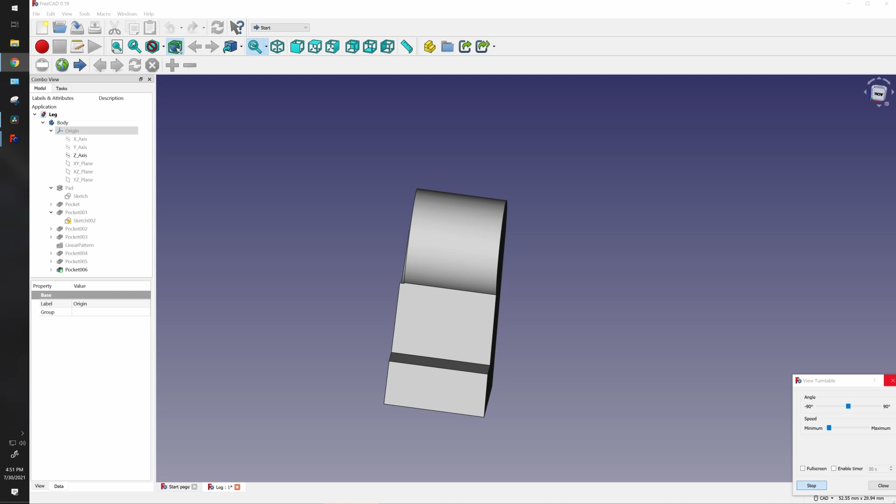Today we're gonna be making a leg for our Lego man. I'm super excited about this one because, you know what? I am a leg man. So let's get on with it.

Create new, and you know what, we're gonna do a little bit of a cheat here. Let's go to part design. You would usually create a new body, but here's a little trick: let's just create a new sketch, and check that out, it automatically makes a body for us.

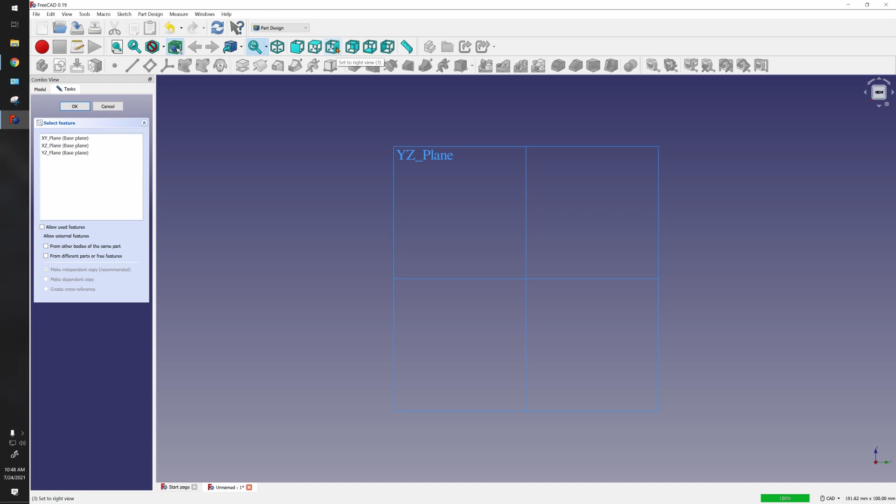So I want to go to my right plane. Click to the right, which is our YZ plane. Click on here, of course. Click OK. Now let's use our polyline tool.

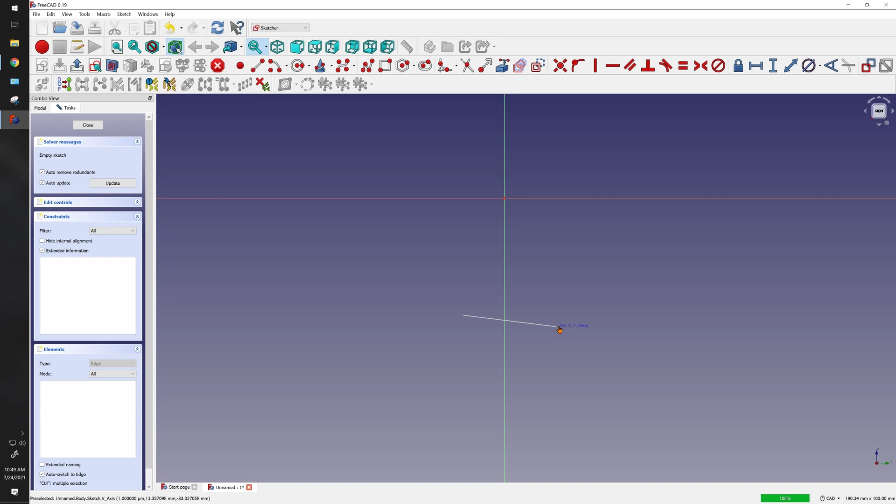What's really cool about this tool is it's got a couple modes. Let's start working with this. Let's start about down here, we'll go over, and I'm purposely making sure I don't have anything vertical or horizontal.

When you get here, click your M key once and then drag over. See this? Click it again. Click it the third time, and look at that, now we got an arc.

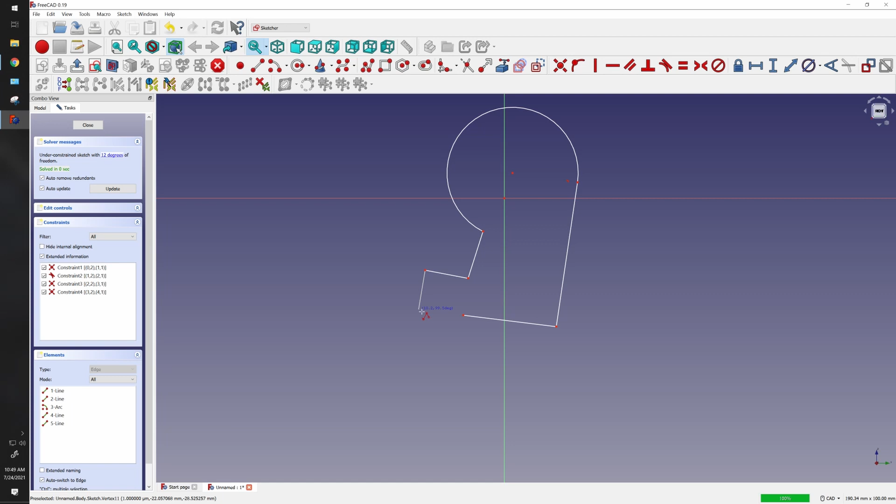So now I could just go like this, and of course now I'm selected. Hit M again, hit M again. I'll go down, we'll go over. And at this point we want to go back here, and look at that, we kind of got our shape, but not quite.

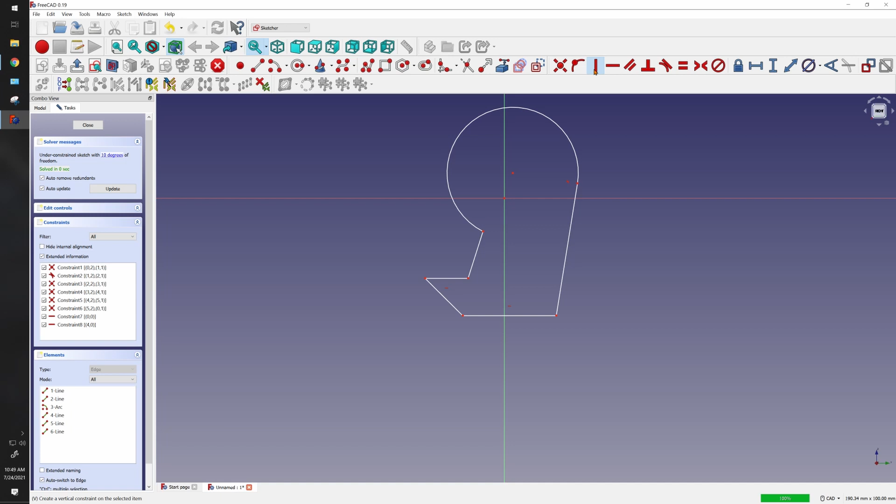We can use constraints to fix this up. So let's do a horizontal constraint, starting with our two lines that are horizontal, this guy and this guy. Now we want to do a vertical constraint, so we have three vertical constraints here, this guy and this guy.

We kind of can see our shape here, which is pretty neat. Of course, I can take this and move things over, and we're not fully constrained.

Because we're lacking dimensions. Before we start with dimensions, I want to lock this into the center. I want to make this the middle of my sketch. So let's grab this guy here, click him here, and click here, and now this guy's the center.

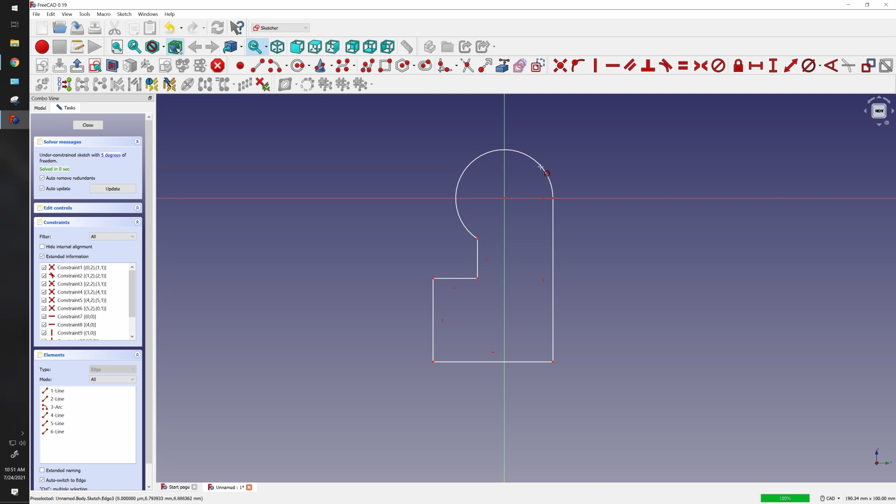This guy's kind of the star, right? Everything will revolve around this dimension. So let's click our diameter, and our diameter here is, of course, 7 millimeters. You can see this will try to adjust and it'll always do funky things.

The next dimension I kind of want to add is let's add this shoe. So I want to go to my vertical, and this dimension is 3.2 millimeters.

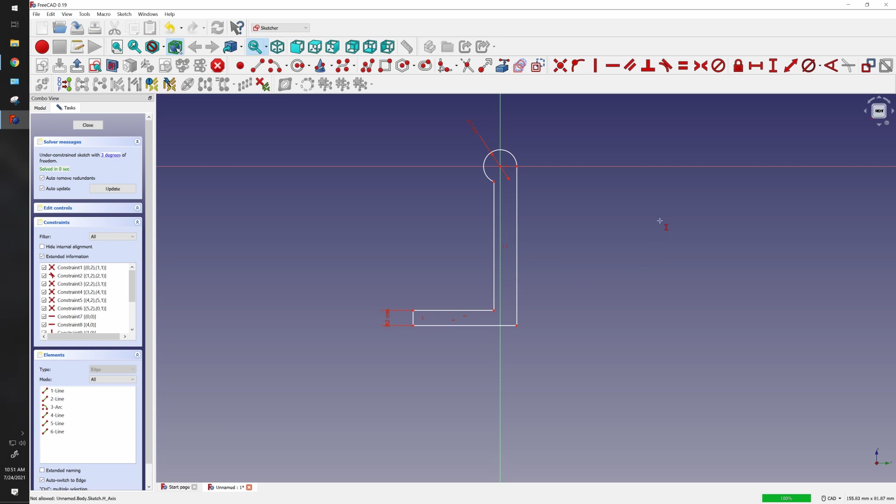Let's keep working on our vertical dimensions, and I'm going to use this one. So let's hit the formula here. Very top to very bottom is 14.72 millimeters.

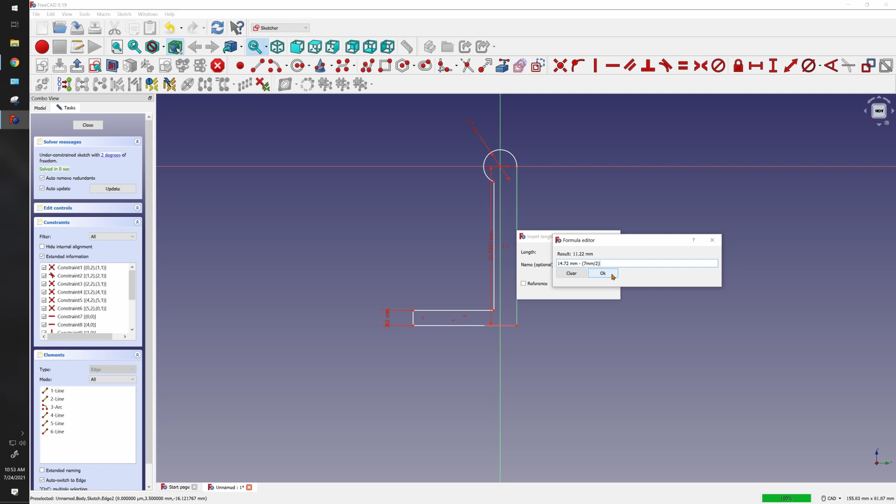The next thing I want to do is subtract half the height of our circle, which is our radius. So we gave it a diameter of 7, so our radius is 7 divided by 2, and that will give us a height of 11.22. Click OK, and now we got our perfect height.

I know the depth of this, so let's give this a horizontal. And the distance on this guy is 5.63.

I know the total one down here, but I also know this guy right here, so I can either give it one or the other. So let's give it this guy, which is 2.2 millimeters. And now you can see that the sketch is completely constrained.

But you know what, I want to see this just for my reference. It just looks good, I mean it feels like it's missing a dimension by not having that. So of course you can click here to make these blue.

And you know what? We can give it a horizontal right here. And as you can tell, it will give me the measurement of 7.83 millimeters. You might notice that this is 7.83 millimeters. Well, I wanted this to be 7.86 millimeters.

So there's a couple ways I could do this. I can either adjust this measurement here, or I can add the difference to this measurement. But I want to do it right through this one, so there's a quick solution. If I click this guy here and click this button, I've just converted him over to be a blue measurement, so he's not constraining anymore.

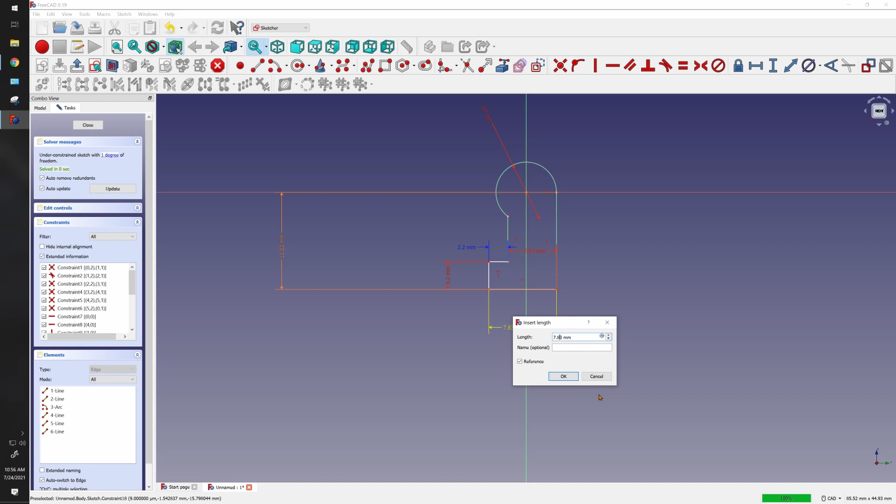And you can see that this broke that. But then I can double click on this guy and actually give him the measurement I want. So 7.86. And as soon as I give him a measurement, he'll go back to being a constraint and it will add it onto there because that constraint's already picked. Pretty cool, huh?

That's the hard part done, guys. Let's get on to the easy stuff. We're going to use a little bit of hot pad action - yeah, I really like that saying from the last video. And I want this to be centered, because later on when we're adding our two holes here, I kind of want that center line to reference.

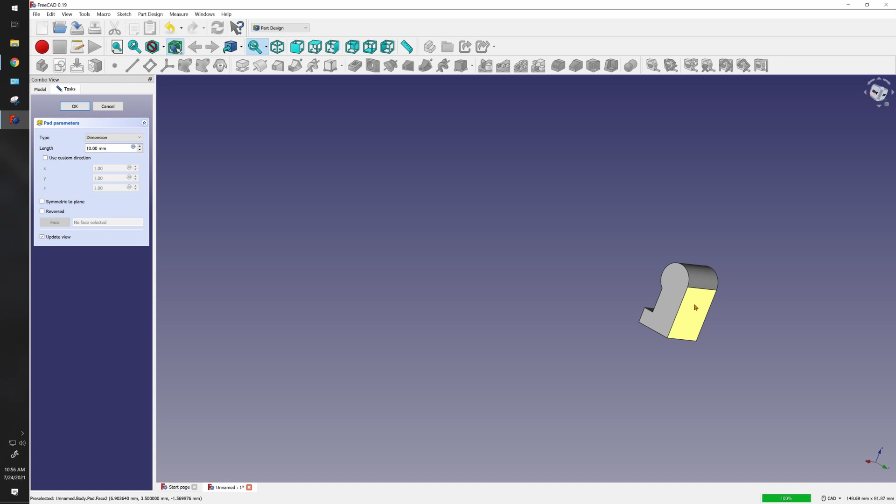To do that, we're going to use symmetric to plane. And just to show you that again, right? So that will give me a line right down the middle, which is awesome. That's exactly what I want. Let me just move that here. And the dimension is 7.18 millimeters.

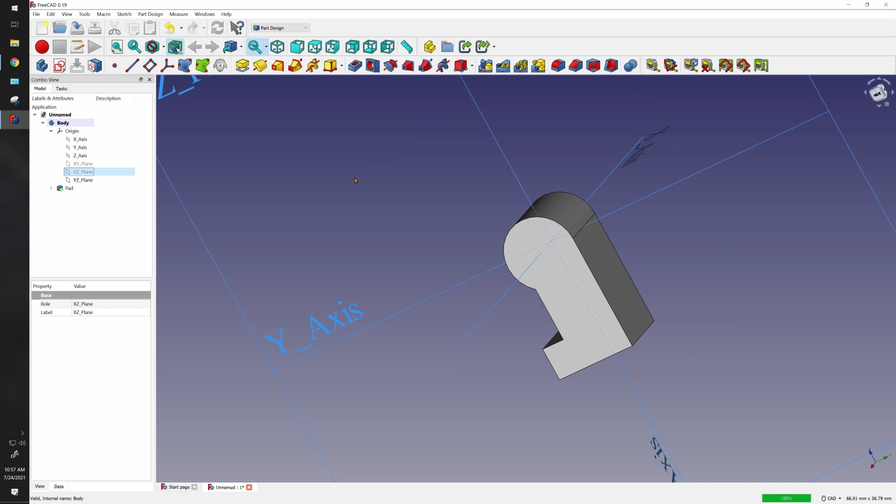And there you go, we have our leg here. Let's get rid of the origin. If you remember, a little bit of a cutout, that's 0.3 millimeters. So we're going to have to get that going. So click on the edge here, and of course make a sketch.

Now we're sketching on that. We know this is the center - this is exactly why I chose this, because I knew I was going to have to do this. Snap it to the middle. Put that out, and now don't forget to put this back to constraint mode. And let's give that our 7 millimeters.

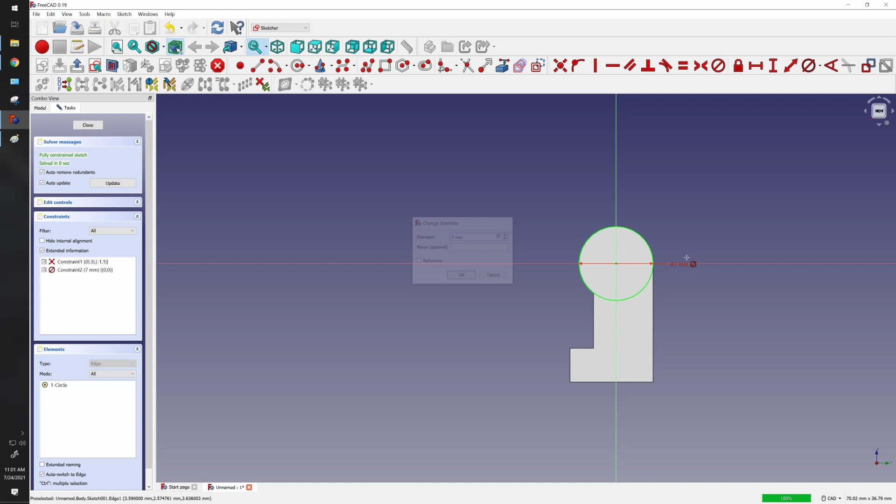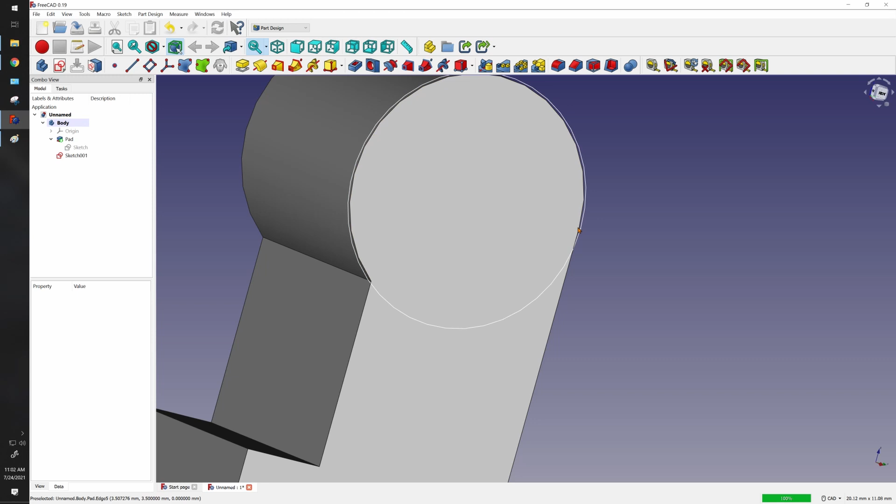Beautiful. Just to be a little different, let's give it a little bit of a bigger dimension. Let's go 7.1. And the reason that I gave it a 7.1 is because if you look at a real Lego man, this line here, this cutout doesn't come to the middle. So I think what they did is when they designed it, they gave it a 0.1 difference.

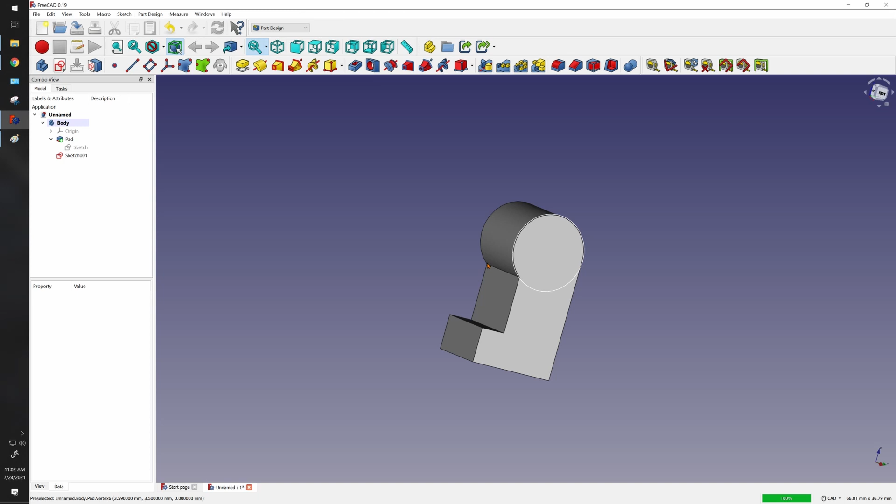Now, some of you keen-eyed individuals might be saying, you just put the cutout on the wrong side. Yes, I made that mistake. This isn't supposed to be a right leg, this is supposed to be a left leg. Now you could just flip the peg leg around, no harm no foul, but I'll show you how we can fix this issue. You don't have to redraw. Notice how this is called sketch 1.

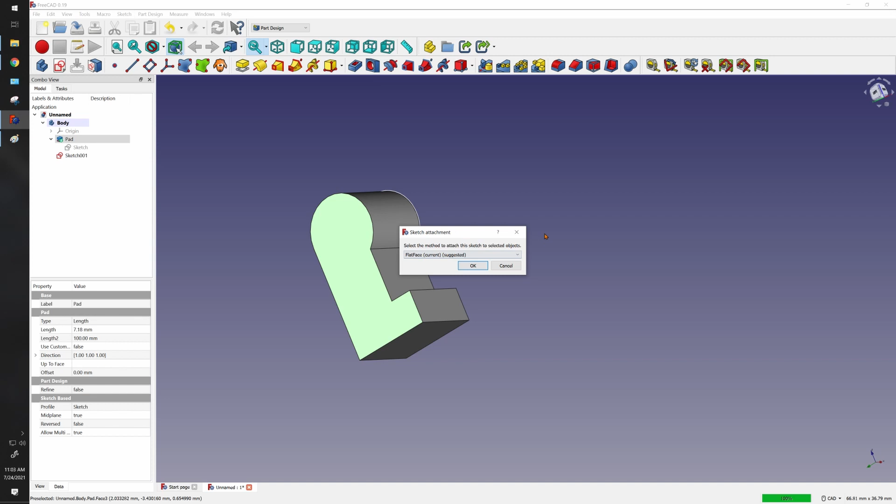Well, if you rotate this over and select this surface, there's a function here, right there, named 'set the support of a sketch'. So basically we can move the sketch over to another plane. It's selected already, we'll click it here, and it asks which sketch do you want to move here - I'll say sketch 1. It asks me for attachment settings, I just usually use the default. Click OK, and now you can see our sketch has flipped.

It's no longer there, it's now right here. So of course, to cut this out, we'll use our pocket - it's our trusted go-to. And of course, we want 0.3 millimeters. Click OK, and there you go. So we got that done. There's another hard part gone.